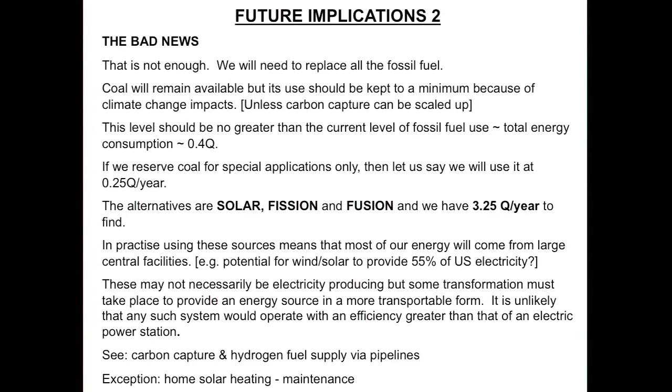So we face the prospect of a significant change in the way energy is going to be delivered for our use. At the moment, the bulk is delivered as fuel, as we said. It's burnt at the point of use. But in future, the bulk may have to come still from central power stations. That's going to require a massive investment program because of the efficiency issues associated with all these alternative energy resources. So it's going to require a change in the total energy demand.

And for example, if we compare the present situation in terms of the fuel burnt at point of use for industry or heating, etc., versus transport, at the moment we're looking at, say, an efficiency of 75 to 80% for fuel burnt at point of use. For transport, 25%. If we were to suddenly convert to an all-electric economy, that efficiency goes down to 50%. For transport, well, in this estimate it was 16%, although there are people who argue that it could get back up to 25% at least with modern electric vehicles.

But what that means, of course, is as the efficiency goes down, the factor increase in fuel demand is going to go up between 1.5 for transport to 2 for electrical power required for fuel burnt at point of use applications. So, if we were to look at, for example, all electric transport, AEE stands for all electric economy, most forms of electric transport are going to require some sort of onboard storage, batteries.

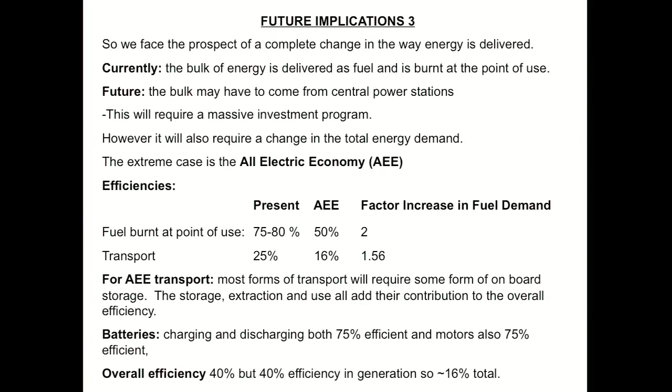All this, of course, assumes that because of larger electricity generating utilities, these efficiencies are quite close to the maximum. Even so, the primary fuel demand is going to rise by about 50% for the same amount of work that we do now. Another way of putting that is that the waste heat emitted into the environment would double.

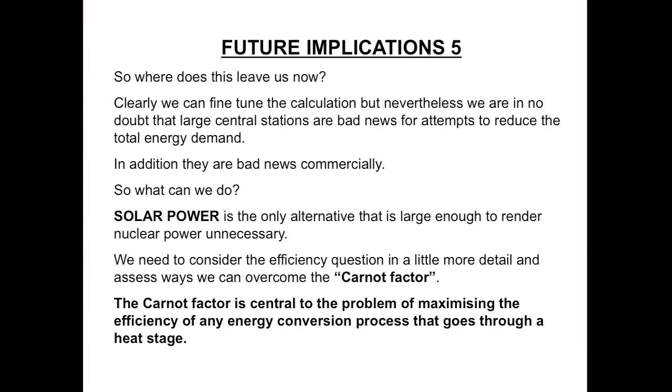Well, solar power is really the only alternative that's large enough to render, for example, nuclear power unnecessary if we get rid of fossil fuels. However, we have to consider the so-called efficiency question in a great deal of detail. And to do that, we have to overcome what's called the Carnot factor assessment. So for all these alternative replacements, we have to think about the efficiencies in the Carnot factor. Remember, the Carnot factor is central to all problems where we have to maximize the efficiency of an energy conversion process that goes through some kind of heat stage.

So, just to summarize that part of the course, resource questions are summarized as follows. Fossil fuels will be exhausted quickly, that's oil and gas, or restricted by climate change fears, coal. They might be extended a little bit using unconventional sources, but not by much. We have alternative energy sources, but with the exception of solar power, we're limited to globally about 10% of the planned 5Q per year target. But remember, we can replace 30% of the fossil fuels.

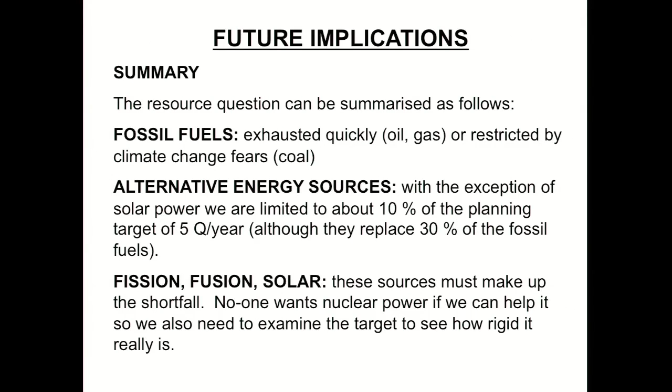Fission, fusion, solar, these must make up the shortfall. The question is which one? No one seems to want nuclear power if we can help it. So we also need to examine the targets that we've set here to see how rigid they really are. Now, of course, some countries have already made the decision, such as Sweden, Belgium, France, Finland, Norway. They've actually gone down the fission route, combined with alternative energy resources. We'll mention that again in a moment.

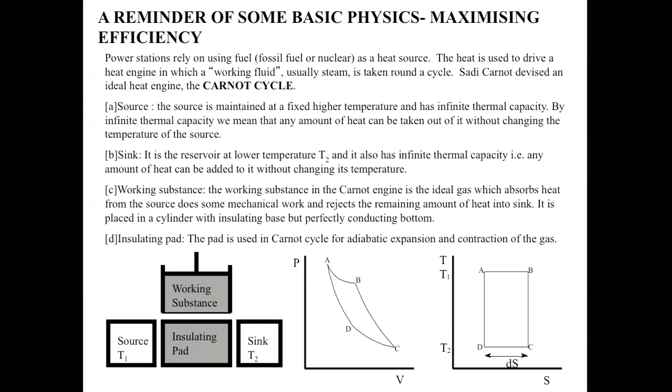I'm assuming that you're all familiar with the Carnot cycle. If you're not, please go through the next 2 or 3 slides just to remind yourself what the Carnot cycle is with respect to an ideal heat engine, where we have a source, a sink, a reservoir at lower temperature, and some working substance, which in the perfect Carnot engine cycle is an ideal gas that absorbs heat from the source, does mechanical work, and then gets rid of the excess heat into some kind of heat sink. So go through these couple of slides just to remind yourselves about the various components of the ideal Carnot cycle. But let's reduce it to the basics here.

So at the top we have our heat source at some temperature T1. We're going to extract some heat, Q1, via a working substance. It might be, for example, burning fuel, producing steam to drive a generator, etc. So we're going to do some net work with that working substance. Any excess heat is then going to be dumped into a heat sink. Now in the perfect Carnot cycle, those two temperatures remain the same because they're assumed to be infinite sources and sinks.

So, in the perfect Carnot cycle, we're assuming that the expansion and compression of the gases involved are going to be adiabatic, so there are no other losses, so we can simply write down the equations for the heat linked to the temperature as simply Q1 equals T1 times the change in entropy, dS, Q2 equals T2 dS for the sink, and of course the work done is simply Q1 minus Q2. And if you take the ratio of those two equations, then Q1 to Q2 is simply the ratio of the heat source temperature to the heat sink temperature.

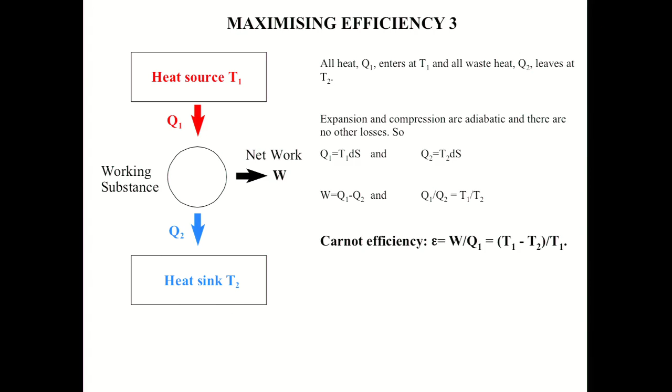Now in a perfect Carnot cycle, perfect heat pump engine if you like, we can define a Carnot efficiency as simply the ratio of the work done divided by the heat input, Q1, which is just the temperature difference between the heat source and the sink divided by the temperature of the heat source. And we can apply that to pretty much any system that's going to use some kind of working fluid to generate power. If we were to apply it to, for example, a big electric power station that burns some kind of fossil fuel, then the temperature of our furnace might be, say, 800 degrees centigrade, and T2, the heat sink, would be about 160 degrees C. So we could calculate a Carnot efficiency of about 60%.

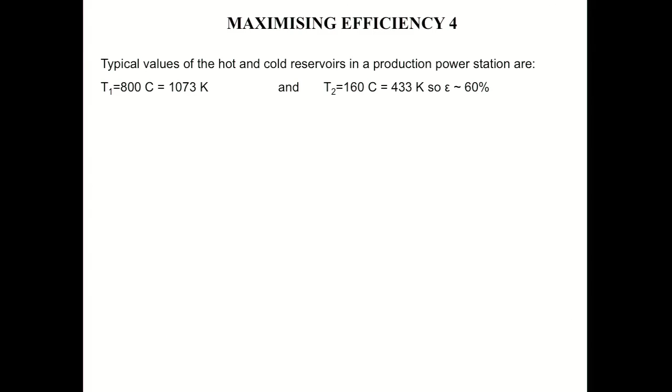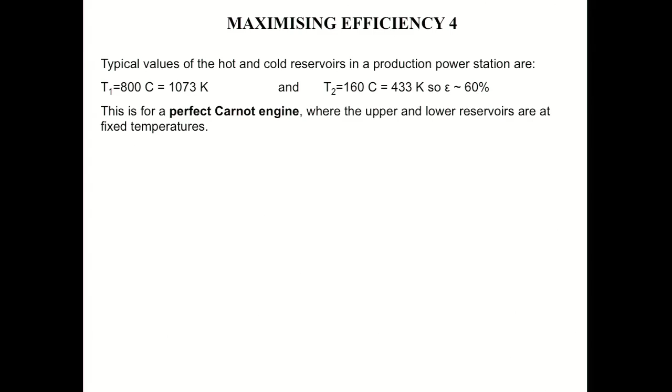Now remember, that's for a perfect Carnot engine where we're assuming the ideal gas is essentially following perfect adiabatic expansion, compression, and everything's isothermal where T1 and T2 don't change. Of course, that doesn't happen. And so we have to apply a slightly more realistic working cycle, which is called the Rankine cycle, where neither isothermal expansion and compression nor adiabatic heating and cooling is achieved. And taking that into account, the efficiency of an ideal Rankine engine is around about 53%. But again, that's an upper limit. The actual efficiency of a good heat engine is about 89% of that Rankine cycle maximum.

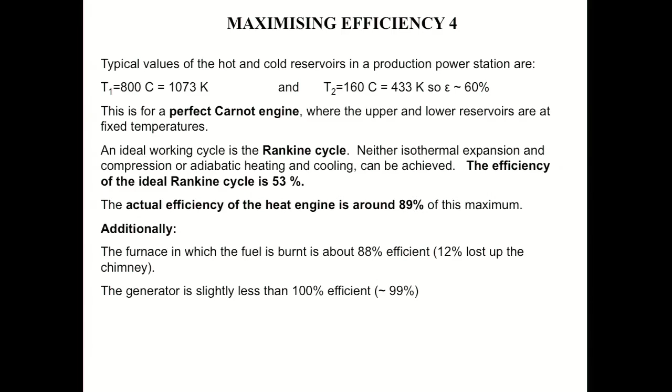So again, the efficiency is reducing what we get out at the end of the day. So let's imagine the furnace in which our fuel is going to be burnt is 88% efficient, and they'll lose 12% up the chimney when we burn this fuel. Let's imagine that these very large electric generators are very efficient. They're about 99%. So our actual efficiency is 53% times 89% times 88% times 99%. The maximum is about 41%.

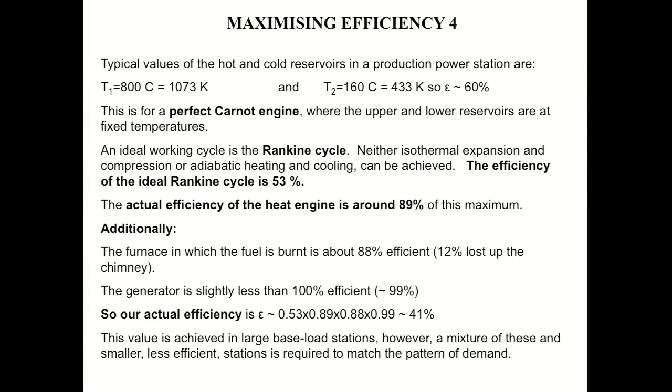And you can just about get 41% from these very large base-load power stations, which provide most of the main loads for electrical power generating networks. Usually, however, there's a mixture of smaller power stations which are required to kick in to provide additional demand, etc. So 30 to 40% is a good number to remember.

And many of you may or may not know that the largest pumped storage system of its kind is actually in Wales, in Dinorwig, near Snowdonia. It's actually built into the mountain of Snowdonia, behind some old slate quarries, Llanberis. So what they do is they pump water into a huge reservoir, the Marchlyn Mawr Reservoir, during a 6-hour period at night. The volume of that big reservoir is around about 7 million cubic meters, and it's at a height of 500 meters above sea level.

So of course you can calculate the gravitational potential energy of all that stored water. It's around about 3.5 times 10 to the 13 joules. It's used to power generators with a typical output of about 1.8 gigawatts, so it's pretty impressive. But put that into context, the average power consumption in the UK varies diurnally from 25 gigawatts at night to a peak of about 50 gigawatts in the middle of the day.

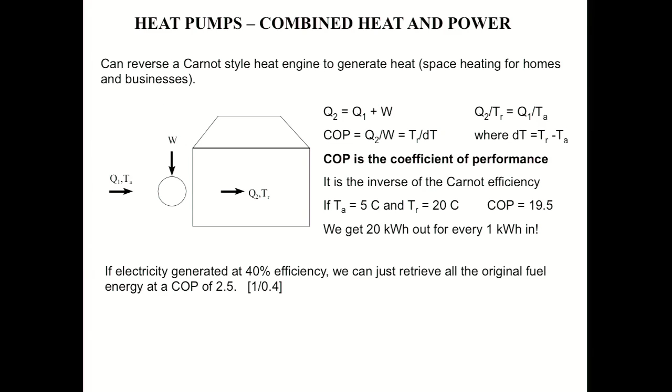However, remember, the electricity we generate has to be taken into account in terms of its efficiency to put the power in to start with. Let's imagine it can be generated at 40%. That means we can just about retrieve all the original fuel energy with a COP of 2.5, 1 divided by 0.4, 40%. So the question is, can we do that? Remember, that's an ideal system. What does it look like in reality? Well, remember, in reality, we have to have some kind of radiators to collect heat and to emit heat.

So there are lots of factors that actually reduce that COP we just calculated. So we might do work in with a radiator which is going to collect heat energy. And to do that, of course, the temperature of that radiator has to be maintained at a much lower temperature than the air temperature. To actually heat the room, we have to have another radiator, like those along there. And of course, the temperatures of those radiators have to be much higher than the actual average room temperature, say T2. So to transfer energy and heat efficiently, T2 is bigger than TR, and T1 is much less than TA. But you can do that.

And for example, if T1 for our external collector is kept at minus 5 degrees C, T2, 45 degrees C, is what we're trying to maintain the temperature of our radiators at. Then, if TA is 5C and the temperature of the room we want to get up to is 20 degrees C, that gives us a COP of 6.4, so a lot less than the COP of 20 that we initially estimated. That's why efficiencies are so important.

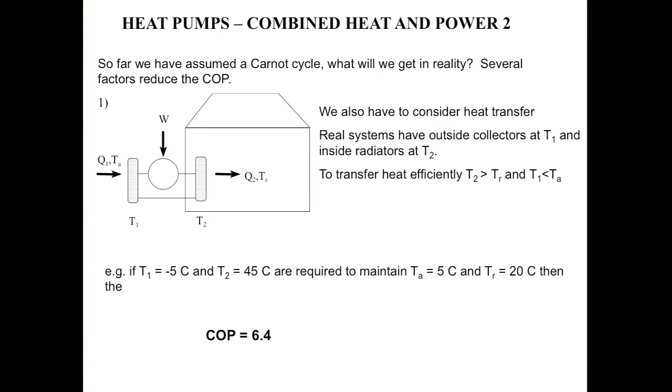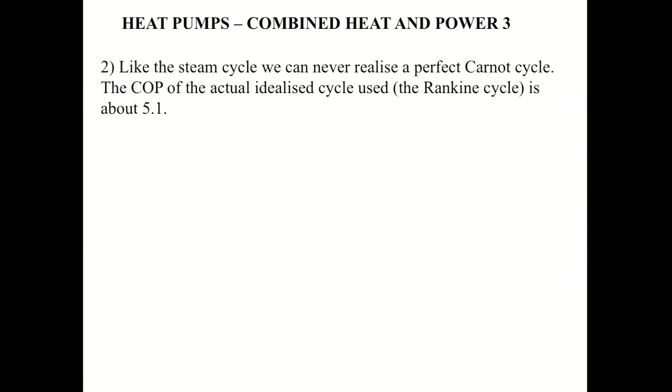So like the steam cycle, we can never realize a perfect Carnot cycle. The COP of the actual idealized cycle used, again we have to go to the Rankine cycle, is actually about 5.1, not 6.4. Real efficiency is never as good as those ideal limits because we have to allow for all these other efficiencies like heat losses in the circulation of the pumps and fans, etc. of our heat pump systems.

And in fact, when you do all that and build something, the realistic value for the COP turns out to be about 3.0. That's just about sufficient to recover all the waste heat lost in power generation. So it's got a slight advantage over standard heating arrangements where you can burn fuel on site to essentially heat water and pump it through radiators. That has an efficiency of around about 80%.

So let's look at a house with a volume of 235 cubic meters and a good COP of 2.5. Let's imagine we have an all-electric house. So the first column shows the kilowatt hours needed for that house. So the heat pump, you'd have to supply 15,000 kilowatt hours. Other uses of electricity in the house, charging your iPad, etc. from the main socket, let's say 12,000 kilowatt hours. So the total might be of the order of 27,000 kilowatt hours.

In terms of the energy delivered, we're looking at 37,500. We're looking at 12,000 for other uses. So the total is 49,500 in terms of the energy delivered. If we convert that to a fuel energy equivalent, assuming say 34% efficiency, we get up to 44,100 and 35,300. So our total is up to 79,400 now. Now remember, the efficiency of this system is the energy delivered, the second column, divided by the approximate fuel energy equivalent, 62% in this case. So that's the efficiency, or is it?

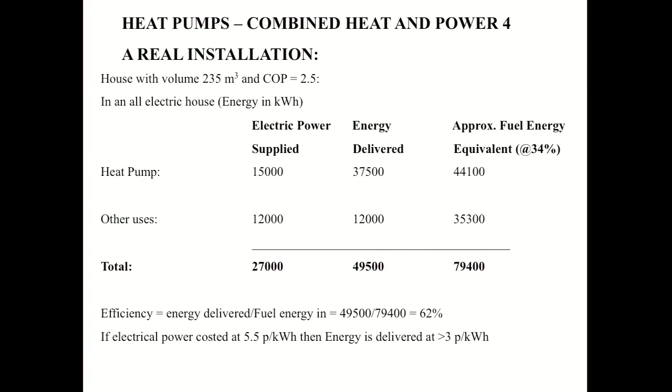Let's now change to a conventional boiler, same size of house, same values here. We don't need to supply any electrical power or negligible power to the actual boiler because we're going to burn fuel oil on site. And that will deliver 40,000 kilowatt hours. Let's say we only require 6,000 kilowatt hours for other electrical power usage. So our energy equivalent at the end of the day is 67,600. The efficiency again we can calculate, 46,000 divided by 67,600, 68%. It's actually a bit more than our previous heat pump system.

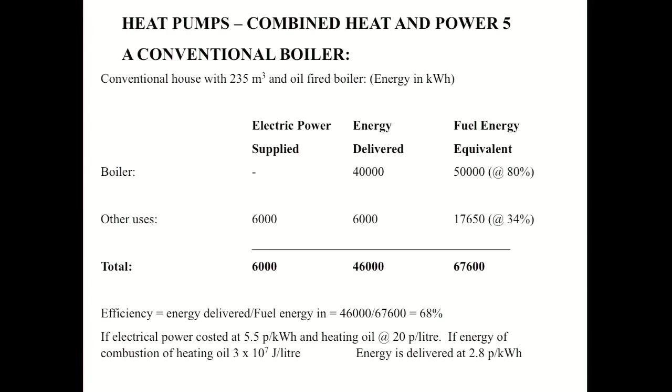And again, let's assume electrical power is costed at 5.5p per kilowatt hour for this column. Let's assume heating oil, whose price may fluctuate quite a lot, is 20p per litre. Energy of combustion of heating oil is this number, 3 times 10 to the 7 joules per litre. If you work that out, the energy is delivered at about 2.8p per kilowatt hour. Slightly less than 3p per kilowatt hour for the previous example. So they're about equivalent. So those are the sorts of efficiency issues you need to bear in mind when you're looking at different ways of producing electricity.

So, what about the future? Well, by 2080, remember, we predicted that energy consumption would reach a steady state of 5 Q per year. We said that's very uncertain because it depends on population trends, etc. But it's dangerous to assume that that's going to be pessimistic. Assume that energy conservation measures, insulation, design, integrated transport, etc., maybe we could reduce demand for our energy by, say, 40%. So we're down to 3 Q per year.

Space heating, which we just discussed, is currently 16% of our electricity demand, believe it or not. But that's not going to be required by people living in the tropics, because it's going to get warm there anyway. However, air conditioning might be, so we need to think about that. But let's imagine we can reduce the demand by 0.3 Q, so we're now down to 2.7 Q per year.

Of course, there is a penalty, as we said, for converting to all electric power. Let's say 50% penalty is the extreme value, so let's look for, say, 40%. Let's exempt space heating because of the use of heat pumps, which we just mentioned. So maybe that will increase the burden back up to 3.5 Q per year.

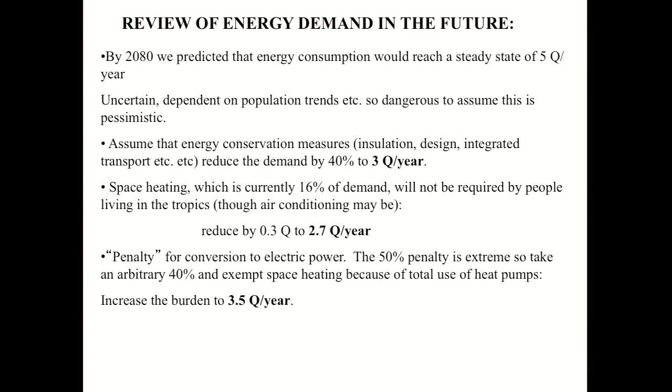And as we said, how does that compare to the resources we've got available? Coal, we said we have to keep to maybe 0.2 Q per year, specialist uses only, emergencies. The alternative energy sources, excepting solar power, we might get half a Q per year out. But it could displace up to 2.5 times that value.

So, after all those numbers floating around, what is the energy gap? There is an energy gap, obviously, and how do we fill it? Well, we have roughly 2.2 Q per year still to find. Where do we get it from? It's got to come from solar, it's got to come from nuclear. Fusion is not practical and won't be for quite some time, so it's got to be from fission, it's got to come from solar.

Now, a lot of the assumptions we've made in this part of the course may seem a little bit arbitrary. They will change as technology improves, as more work is done. But remember, we've always tried to take the upper bounds in our estimates. So it's unlikely we're going to manage to actually get to our energy requirements or needs at the end of the century without such a deficit using current technology.

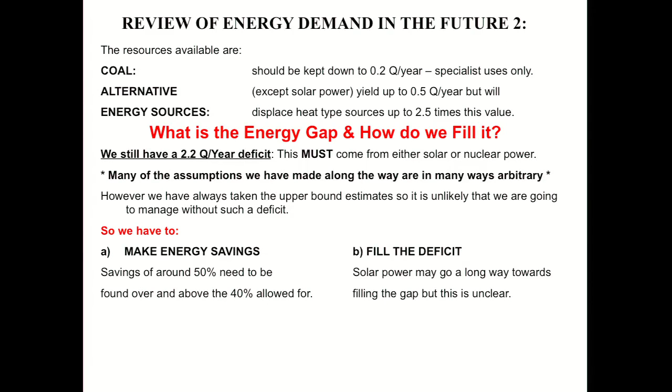So what do we do? Well, we have to make energy savings, but we would need to make about 50% over and above the 40% that we've already allowed for. That's a big challenge. Or we fill the deficit. Now, solar power may go a long way towards helping with that, but it's still quite unclear. So we have to make a decision on the future of nuclear power. There's no getting round it.

Some people are arguing that carbon capture might be the answer. Google Carbon Engineering to see the first demonstration plant in Canada. But if you listen carefully to their advertising video, you'll see that the actual amount of carbon currently extracted back from the atmosphere is a drop in the ocean. It needs to be scaled up to very large amounts, but it could potentially contribute to, for example, transport fuel.

As we said, there are other countries who saw this coming a long time ago, in the 1960s, 70s, not for quite the same reasons we're worried about now. For example, Sweden made the decision a long time ago to combine hydroelectric, wind power and fission. Their word for fission or nuclear power is kärnkraft. There's a short presentation on Blackboard if you want to look at it, which compares nuclear fuel, its advantages, with coal, oil and gas. It's one opinion. I'm not saying it's the correct one, but have a read of that because it's quite interesting.

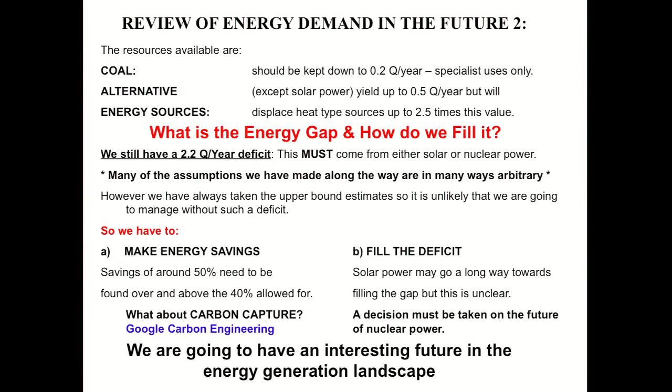So, what we can say is we're going to have a very interesting future in terms of the energy generation landscape over the next 50 years. To finish, I'd just like to repeat a question that was posed to some physics and engineering students by a certain Dr. G.K. O'Neill. Some of you may have heard of him. He eventually ended up working at NASA.

So he asked his students, is the surface of a planet really the right place for an expanding technological civilization? So they had an entire semester to go away and do their research and come up with an answer. And in particular, he also asked them what might be the ways to actually mitigate that expansion. And based on their research, he came up with the answer no.

And he said if we begin to use it soon enough, this technique, and if we employ it wisely, at least 5 of the most serious problems now facing the world can be solved without recourse to repression: bringing every human being up to a living standard now enjoyed by only the most fortunate, protecting the biosphere from damage caused by transportation and industrial pollution, finding high quality living space for a world population that's doubling every 35 years, finding clean, practical energy sources, preventing overload of the Earth's heat balance.